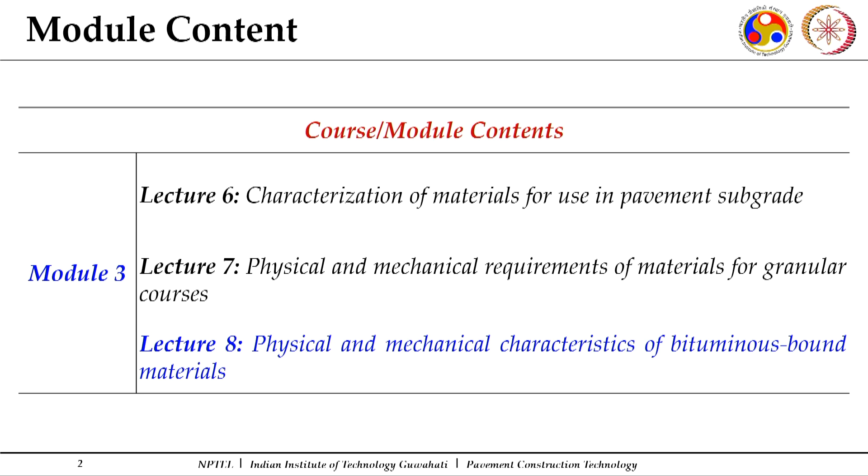Today's lecture will be a part of the discussion on the characterization of bituminous bound materials under module 3 of this particular course. At the very beginning, I would like to acknowledge the use of text, information, graphs and images sourced from various textbooks, codal standards, journal articles, reports, newsletters and public domain searches.

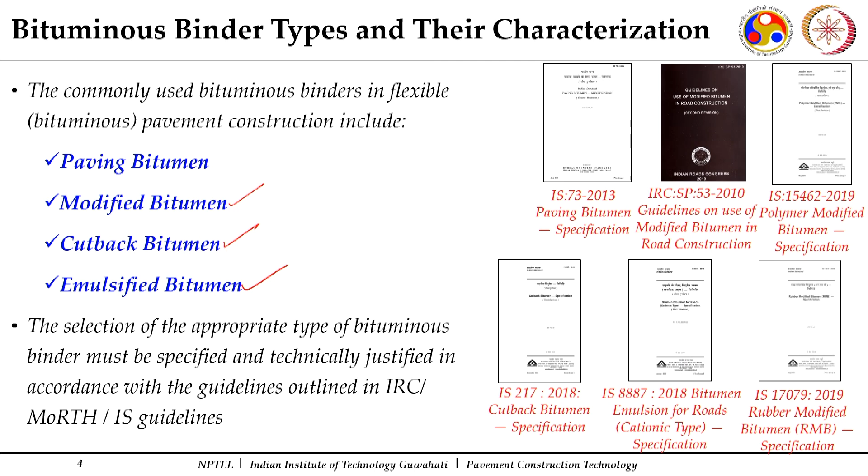In the previous lecture, we discussed the paving bitumen, the importance of bitumen, and what tests are normally used to characterize the paving bitumen. Then there are other forms of bitumen which are also popular: modified bitumen, cutback bitumen and emulsified bitumen. So, we will briefly discuss what these binders are and what applications they are put to in flexible pavement construction.

Now, as the term itself says, modified bituminous binders. So, you are modifying the bituminous binders or the bitumen, and what is the purpose behind this modification? What do you want to achieve by adding these modifiers to your paving bitumen? Normally, first of all, we want to improve the asphalt aggregate bonding, because this is very important.

If you have a good bond between binder and aggregate, you will have a good durable mix which will perform better under all different conditions. So, your binding between the bitumen and aggregate has to be good enough. If by any modification it gets enhanced, that modification will always be better for the performance. Next, to enhance the aging resistance, we have seen the aging determination in terms of the thin film oven, rolling thin film oven and pressure aging vessel, and we want the bitumen to age less during the production process and during its service life. So, any modification that makes a binder age resistant, or resistant towards oxidation, will be preferred.

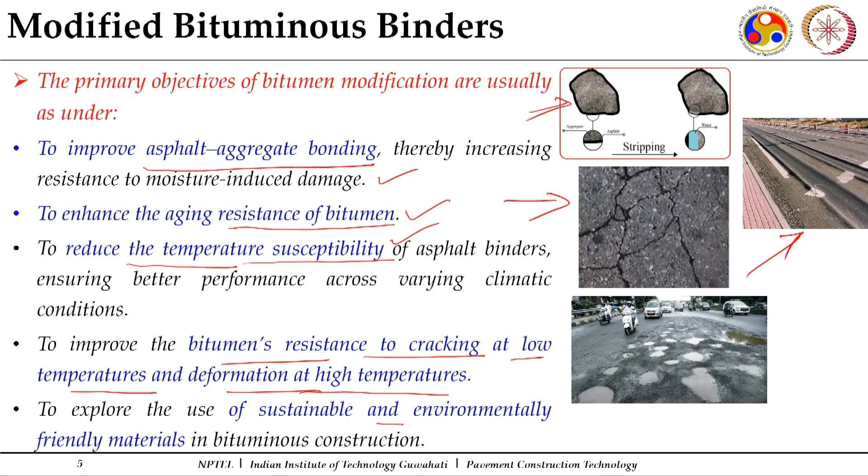Certain modifications are also attempted with some products to add sustainability to these bituminous mixes. You might have heard of the addition of waste plastic as a modifier in bituminous mixes. So, the binder is modified through the use of waste plastic. There we are trying to make use of a waste product in the binder modification, and the product we want to achieve is a good product with higher performance, which is also more environmentally acceptable because you are making use of waste products or alternate materials in construction. So, these are certain reasons because of which binder is modified.

The most common modification takes place with the use of polymers. The term polymer refers to a large molecule made up of many smaller molecules, called monomers, chemically reacting, and they form large chains and clusters. We have an IS specification, IS 15462, which defines the different characteristics of modified binder. These are synthetic, especially petroleum derived, products, and when the bitumen is modified by using these polymers, we call it polymer modified bitumen.

And these polymers are mainly divided into two categories. One is plastomeric thermoplastic polymers and second is elastomeric thermoplastic polymers. This is the one which is more preferred for binder modification, and few examples of what type of polymers are there under these categories. You have polyethylene, ethylene vinyl acetate copolymer, ethylene methyl acrylate copolymer, ethylene butyl acrylate copolymer, ethylene terpolymer. These are some of the polymers which fall under the category of plastomeric thermoplastics.

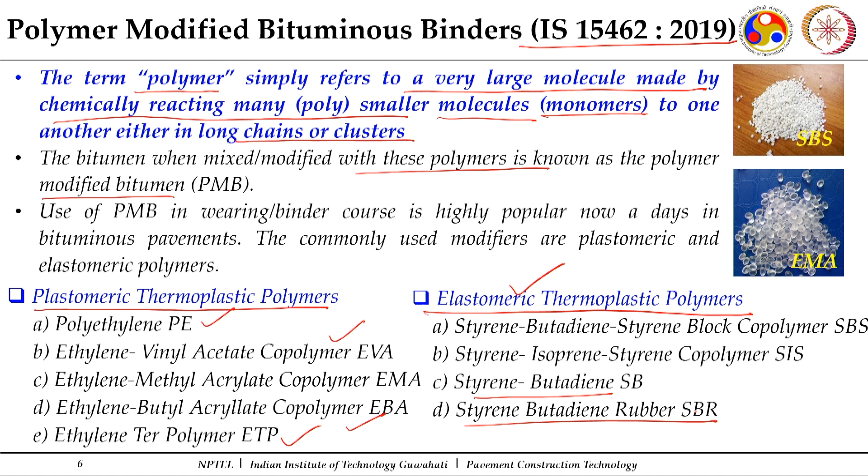And the quite commonly used elastomeric thermoplastic polymers are styrene butadiene styrene block copolymer, SBS, styrene isoprene styrene copolymer, SIS, and styrene butadiene rubber. So many other products in addition to this, like waste plastic I mentioned, that's also a kind of polymer. Then waste tire rubber is also used for binder modification. But the target is to enhance one or the other characteristics of the paving compared to the paving grade binder when you are modifying it.

The tests which need to be conducted specifically for judging the suitability of polymer modified binder are given by IS 15462. Many common tests are there which we do in the case of paving bitumen. In addition to this, for modified binders we need to work out the viscoelastic nature of the binders, and for that a dynamic shear rheometer is used, and many parameters derived from the dynamic shear rheometer analysis are also used to judge the suitability of the different modified binders. And as we had the viscosity grades of the paving grade binder, similarly here you have the different grades for polymer modified binder also.

You can see one grade is PMB 64-10, second is 70-10, third is 76-10, fourth is 82-10, and 76-22. So 64 represents the maximum pavement temperature for which this particular binder is suitable, and minus 10 is the minimum pavement temperature which can be for that particular region. So any region experiencing a maximum temperature around 76 degrees and a minimum temperature of minus 10 degrees, this PMB 76-10 will be suitable for it.

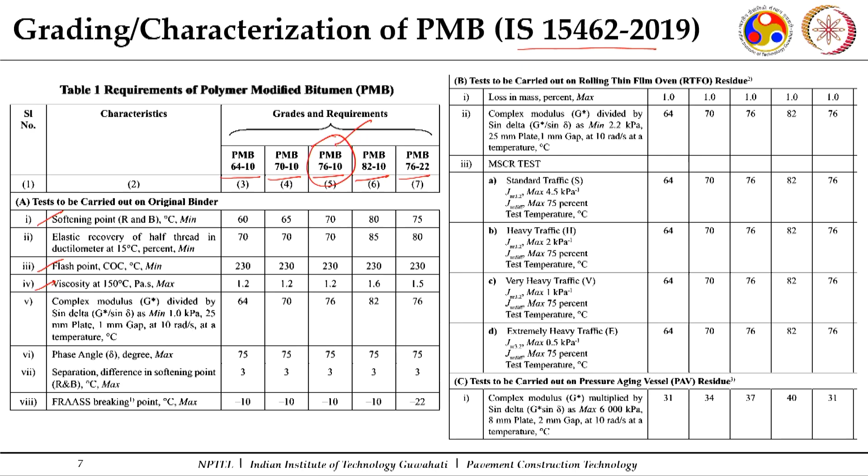And for the different requirements in terms of the parameters, you have some of the common ones which were used for paving, like softening point, viscosity, flash point. In addition to this, there are certain parameters derived from the dynamic shear rheometer to understand the viscoelastic nature, because now we are using modified binders which incorporate some polymer. So how well it is dispersed, how the compatibility is between the modifier and your neat bitumen, all these need to be ensured. So there are different tests and requirements for the different grades to be used.

The application of these different grades is also for different regions, as I mentioned. It says that for PMB 64-10, with an average maximum pavement temperature less than 64 degrees centigrade and minimum pavement temperature greater than minus 10, the 64-10 grade can be used. If I look at PMB 76-22, it has an average maximum pavement temperature less than 76 degrees and a minimum pavement temperature greater than minus 22 degrees. So depending upon the region in which we are using it, we can select a polymer modified binder grade.

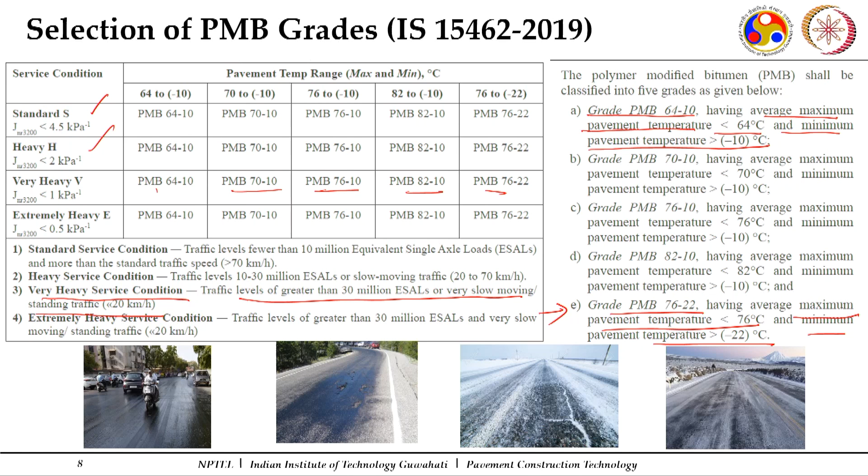In addition to this, it says for different traffic levels also: standard, heavy, very heavy, extremely heavy traffic conditions. Let us pick one case, very heavy service conditions, with traffic levels greater than 30 million standard axles, or very slow moving traffic. For that case, it is preferred that you select any grade out of this particular set. So this is the requirement depending upon different regions, and then there is a requirement regarding the G*/sin δ value. This is again a parameter derived from the dynamic shear rheometer to understand the binder's resistance towards high temperature deformation. So on the basis of this, different modified binders can be selected for use in different regions under different traffic loading conditions also.

Now, the other category of binder is the cutback bitumen. Cutback bitumen, as the word itself says, means we are cutting back something. So what are we cutting back here? We are cutting down the viscosity of the bitumen. It refers to a type of liquid asphalt produced by blending or cutting back paving grade bitumen with suitable petroleum distillates. When we add these petroleum distillates, we are lowering the viscosity of it, and these petroleum distillates are known as cutter stock or diluents.

So, we are producing this cutback by adding certain petroleum distillates, and we are bringing its viscosity down, and with this particular one we can apply it to the aggregates at lower temperatures also, because otherwise when you need to coat the binder over the aggregates at ambient temperatures, it is stiff, in a semi-solid state. So, the binder needs to be heated to temperatures around 150 degrees centigrade, and then aggregates also simultaneously need to be heated, and then they need to be mixed up.

So, this heating of binder can be avoided if the viscosity of the binder is already reduced. That we can do with the addition of these petroleum distillates. Now, this process reduces the viscosity of bitumen, making it easier to handle and apply at lower temperatures, because now you do not need to heat your aggregates to those high temperatures as well as your binder.

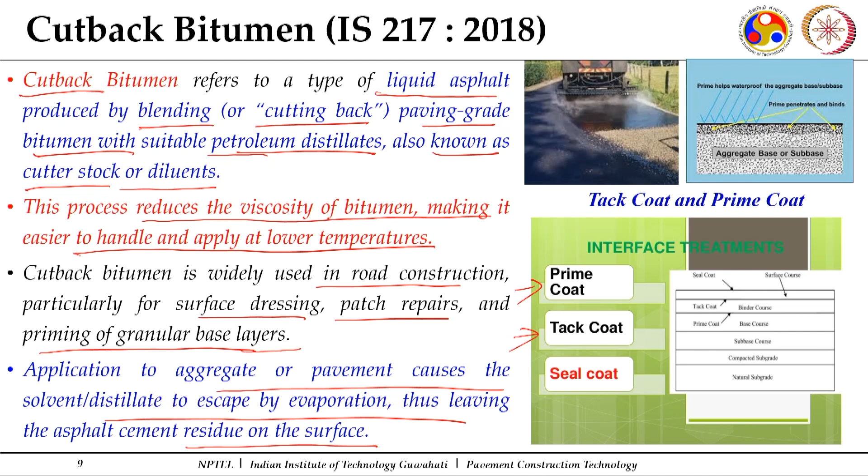This is shown as an application of a prime coat or an application of a tack coat. Normally, when we want to construct a bituminous course over a granular base course, we will first apply a prime coat, and thereafter we will go for the bituminous construction. And if there is an existing old bituminous pavement and you want to overlay it with a new bituminous layer, then the existing pavement is also given an application of a bituminous binder, which we call a tack coat. This we will further discuss when we will be discussing the construction of the bituminous courses.

Now, as there were viscosity gradings VG 10, 20, and PMB grading 76 minus 10, 76 minus 22, similarly, there are different grades for cutbacks also, and they have different applications. Like this is a rapid curing cutback where you are using a distillate which is naphtha, which evaporates very quickly. This particular one is used when no fine aggregates are available. If you want to prepare a mix with rapid curing, because the distillate will evaporate very quickly, you will get very little time to work with it. That is why you do not want very fine aggregates, because fine aggregates require more time for mixing because of their higher specific surface area.

And then there is another grade, medium curing cutback, where you are using some diluents like kerosene, and here it says that 40% of fine aggregates can be used. And again, some heavy oils are used to prepare the slow curing cutbacks, and here it says that more than 20% of fine aggregates can be used.

In addition to this, there are different grades within each rapid curing cutback also. There is RC 70, RC 250, RC 800, RC 3000. What does it represent? RC 70 means the kinematic viscosity, when measured at 60 degree centigrade, should be in the range of 70 to 140 centistokes. Similarly, for rapid curing 250, the kinematic viscosity when measured at 60 degree centigrade should be in the range of 250 to 500 centistokes.

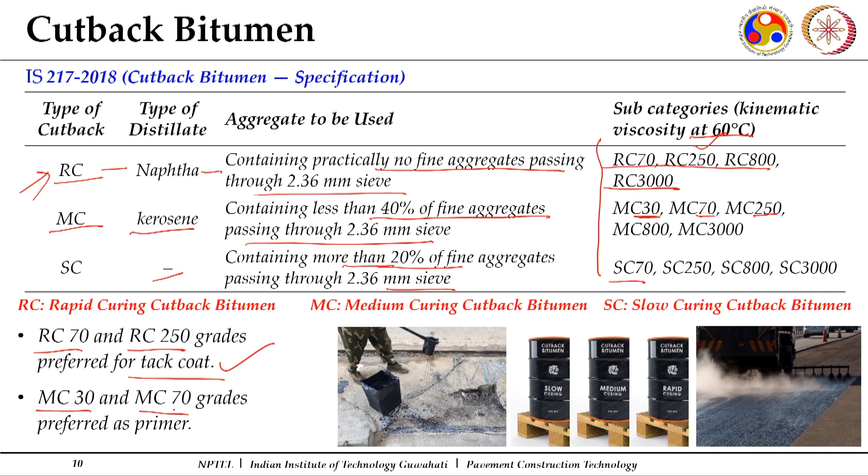So, this gives the idea about the viscosity of that particular grade, and as I mentioned, different applications are there. Like for rapid curing 70 and rapid curing 250 grades, it is preferred to be used as a tack coat. For medium curing 30 and medium curing 70 grades, it is preferred to be used as a prime coat. So, it is important to select the right grade for a particular application.

Now, the fourth category of binder is emulsified bitumen, or emulsion. Bitumen and water are two immiscible liquids.

Again, here the purpose is how we can bring down the viscosity of binder so that we can make an application at lower temperatures. So, one was adding the petroleum distillates, and second is this particular process which is called emulsified bitumen. Now, what is done? It is said that mechanical and chemical processes are involved to combine two or more materials that will not mix. Binder and bitumen and water in general will not get mixed. So, this is what is there, they will exist in different phases.

Now, what is done here? Bitumen emulsion is a liquid product in which bitumen is suspended in a finely divided condition in an aqueous medium and stabilized with a suitable material. So, what is done here? You have the two components taken here. You have water along with an emulsifying agent, and you have a bitumen. So, now you want to mix this. So, what is done here?

The bitumen is brought down to small globules, and this water along with the emulsifying agent imparts a charge on your bitumen globules. So, then the bitumen globules remain in a suspended condition. This aqueous medium along with the fine globules of bitumen leads to a lower viscosity, and this emulsified bitumen then can be applied at lower temperatures. So, hot bitumen and water containing an emulsifying agent are passed under pressure through a colloidal mill. This is a colloidal mill producing fine droplets of bitumen uniformly suspended in water. This is how it gets suspended. This is how a bitumen emulsion is made.

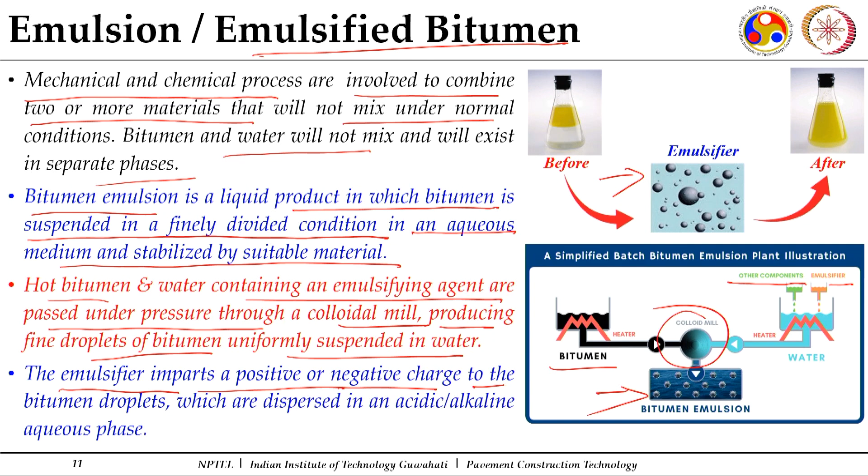So, the emulsifying agent which we use can impart a positive or a negative charge. If it imparts a positive charge, it is a cationic emulsion; if it imparts a negative charge, it is an anionic emulsion, with the bitumen droplets dispersed in an acidic or alkaline aqueous phase. Now, one example is the cationic emulsion. The emulsifying agent is introducing positive charges over the bitumen globules. So, this emulsion will have more affinity towards aggregates which are slightly negatively charged or slightly acidic. Most of the siliceous aggregates which are generally available are slightly negatively charged. So, these aggregates will perform better with your cationic emulsions.

And again, a cationic emulsion is one in which the emulsifier gives the bitumen particles a positive charge while surrounding the water in slightly acidic condition, and this emulsion breaks when the positive charge is neutralized. So, when you mix it with the aggregates, this gets neutralized, or when you apply it on the surfaces, it gets neutralized and the breaking of the emulsion takes place, and after some time the water evaporates and the binder remains over the surface of the aggregate or the existing road surface. Similarly, it is for anionic emulsions where the anion or the emulsifier is at the interface with bitumen, it is negatively charged, and the aqueous phase is alkaline.

So, again we have IS 8887 for cationic emulsion specifications, and IS 3117 for anionic emulsions. They state certain codal provisions and test procedures to check the suitability, whether a particular grade which is supplied by a refinery or a bitumen modification plant is to the standard or not. So, we need to check as per the requirements of IS 8887 for cationic emulsion and IS 3117 for your anionic emulsion. And as I mentioned, again here there are 5 grades: rapid setting grade 1, rapid setting grade 2, medium setting grade, slow setting grade 1, slow setting grade 2, and they have different applications.

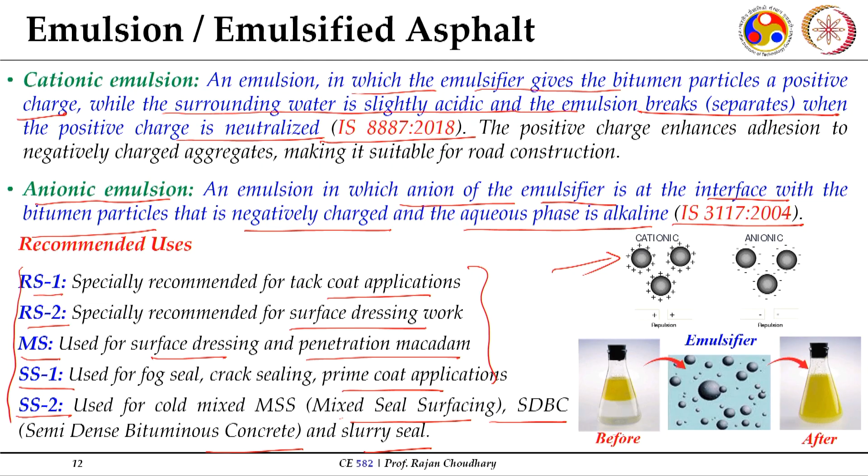Rapid setting 1 can be used for tack coat, surface dressing work, penetration macadam, and prime coat applications, and slow setting 2 can be used for producing mixes like semi-dense bituminous concrete mix which we discussed, and the other mixed seal surfacing or slurry seal. So, depending upon the grades, there are different applications of this emulsion.

But the concern with both of these binders is, in one case the distillate is lost to the environment. So, because we are losing some costly products to the environment, from the cost aspect also, from the environment aspect also, it is not good. The challenge with emulsified asphalt is that in both the cases you do not require to heat the binder, and the aggregates also do not require to be heated to those high temperatures which you require in case of paving bitumen. But in case of emulsified asphalt, when water evaporates, it leaves spaces.

So, if you are having a mix in it, when the water evaporates, void spaces are created because of the evaporation of water. So, the density is less. That is why there are certain things which need to be taken care of when you are making use of these emulsified asphalt prepared mixes.

Now, with some of the aggregate tests we discussed when we were discussing the granular courses, characterization of materials for use under the granular courses. In addition to those requirements, we discussed the Los Angeles abrasion value, the aggregate impact value, wet aggregate impact value, combined elongation and flakiness index, and the soundness test, a sort of durability test. In addition, water absorption value was also there.

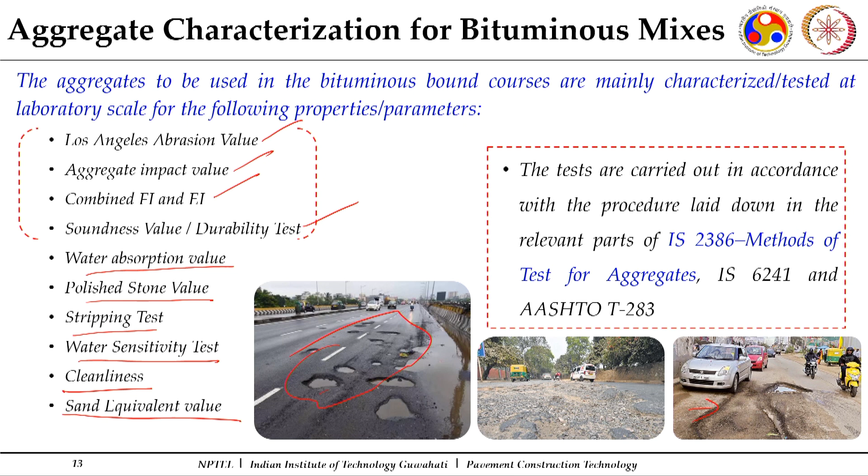So, you need to check your binder as well as your aggregates to the best of the requirements, the latest standards available. Now, first of all, looking at the aggregates from the bituminous bound aspect, coarse aggregates, fine aggregates, and the filler are the 3 proportions which we have discussed. There we also discussed that when we are using any crushed gravel, at least 95% by weight retained on 4.75 mm should have 2 or more fractured faces. So, this is one important requirement.

Rest, it says that the coarse aggregate to be used in bituminous bound courses should be clean, hard, durable, of cubical shape, free from dust, soft or friable material, or organic or other deleterious matter. So, this should be ensured whenever any source of coarse aggregate is selected.

Fine aggregates, it says, especially when you are using them in the binder and the wearing course. Wearing course is the top course below which comes our binder course. When these 2 courses of flexible pavements are there, we will not prefer to use natural sand in these 2 courses. If we go a course lower than the binder course, which will be your base course, we can use only 50% natural sand, because natural sand does not impart good resistance towards deformation. It is completely rounded, so there is a lot of chance that the particles don't get interlocked in a good manner, and when the traffic or stresses come over that particular bituminous course, it gets deformed. So that's why the percentage of natural sand is controlled or limited.

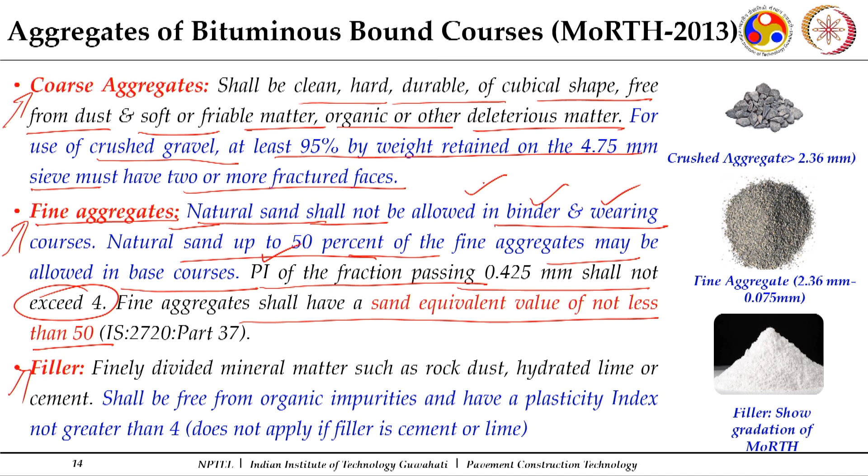This can also be ensured through the plasticity index requirement which is given. It says that the plasticity index of this material should not exceed 4. So this is another requirement mentioned for fine aggregates. So we have the requirement in terms of sand, the requirement in terms of plasticity index, and the requirement in terms of sand equivalent value.

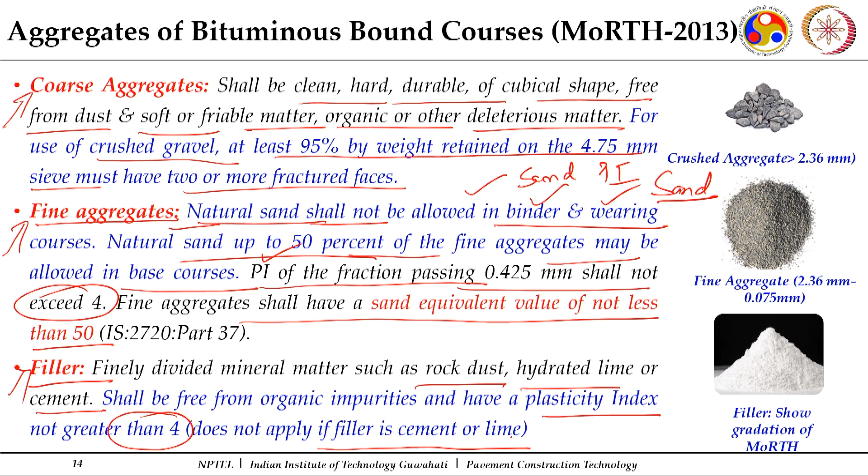Then comes the filler, the finest one. Normally, 85 to 100% of the material should pass through the 75 micron sieve. This is normally what is called filler, the material which usually passes in this percentage through the 75 micron sieve size, and this material can be rock dust produced from stone quarries, hydrated lime, or cement. Again here we are going to check the plasticity index, and it should not be more than 4, and this plasticity index requirement can be omitted if the filler is cement or lime, because they are non-plastic materials.

Now what is required here? We need to look into the cleanliness part, or we can say the grain size analysis part. One requirement is that the aggregate has to be clean.

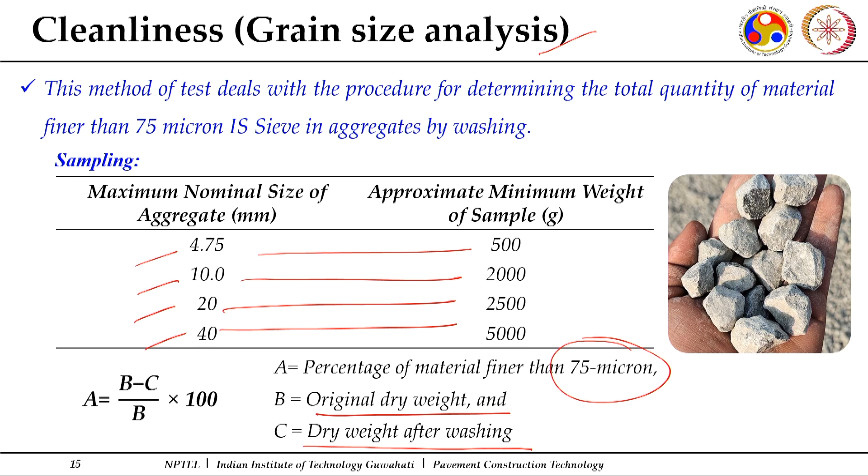How much amount of material is to be taken up, and then we are going to sieve it. What we are going to see is that here B is the original dry weight, and C is the dry weight after washing. Wet washing is to be done through a 75 micron sieve. So all fines should pass, and we will see how much percentage of fine is there. So this percentage needs to be restricted when you are using any material in bituminous bound courses. Any fines which got stuck to these coarse aggregate particles should be within a given limit only.

Otherwise, if this dust is more over an existing aggregate surface, the bonding of a bituminous binder with this aggregate will get affected because of the presence of this dust in between the binder and the aggregate surface.

Sand equivalent value, as I mentioned, is again to get an idea about how much amount of clay is present here. This test is to be conducted as per IS 2720, and here specifically an oven dried sample is taken, and we prepare a solution which we will put in this cylindrical measure, and then the fine aggregate sample is to be introduced into it.

It has to be allowed to settle for a period of time, then you are going to agitate it, then it is again allowed to settle, rest for a period of time, and then finally you are going to see the reading. When it gets settled down, you are going to lower the assembly. It says that a weighted foot assembly is gently lowered and it rests over this particular one, where you can see two different layers. One is your sand and the second is your clay.

So you are going to measure the sand height and you are going to measure the clay height, and the sand equivalent value is sand reading upon clay reading. It should be at least greater than 50%. This is the requirement we saw in the previous slide. So this controls the amount of clay which can be present in your fine aggregates. We are ensuring this through plasticity index also, but we ensure through sand equivalent value also to control the presence of fine materials.

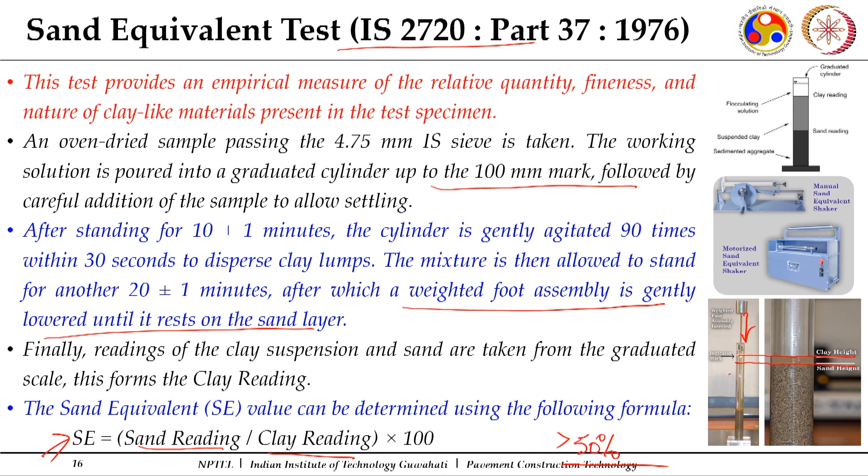Water absorption: certain aggregates may have more surface voids, and they may capture a lot of water, specifically when they are lying open. When aggregates are produced at crushers and lie in open spaces during rainfall events, they will absorb some water. So one is the natural moisture content which is present, and if these surface voids are more, when these aggregates are used with any bituminous binder, these surface voids will occupy more amount of binder also. This will make your mix more costly, because the binder which goes into these superficial voids will not help you to develop any bonding or strength, because it goes inside the surface voids.

To ensure this, we check the water absorption of the aggregates, that is, how much amount of superficial voids are there. This is how it looks. This is an exaggerated view. You can see these surface voids are there. These surface voids get filled up with water if I keep these aggregates in water for say 24 hours. Then I take it out and rub gently the surface water which will be present. Only the water which is within these voids will be considered for water absorption. When this is done, this condition is known as saturated surface dry. So you have saturated the aggregate particle, and the surface is also dried.

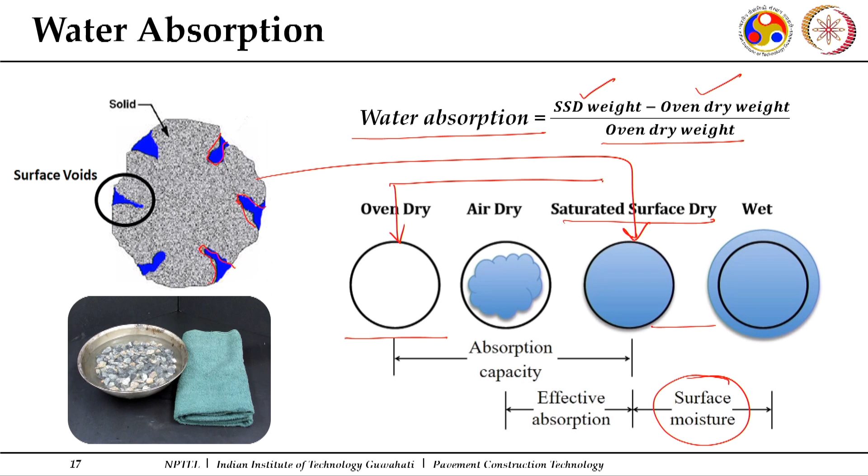So here in this case, once you submerge the aggregates in the water, take it out, you remove all surface water by gently using any towel or cloth, and then what you get is your saturated surface dry. And these two, oven dry weight and saturated surface dry weight, are used to determine the water absorption. Another parameter which is used is the stripping value of your aggregates.

Now this test is used to judge how good the binder is coating with your aggregates, especially because binder will be more or less having in general a good affinity with the aggregates, but certain aggregates have more affinity towards water compared to bitumen, and certain aggregates have more amount of water absorption, surface voids. So we want to see how good that aggregate forms a bond with a given sample of bituminous binder.

So for this one, we'll prepare a mix with a given weight of aggregate, we'll add a binder to it, and this is to be done as per the Codal specification. Aggregates are to be heated to a particular temperature, binder is also to be heated, 200 gram of aggregate sample is taken, around 4% of it, 8 gram of bitumen is to be taken, both of them are to be mixed together. Then you need to transfer it to a cylinder, a measure where it will be covered with water, and before subjecting it to this, the mix which is prepared is kept in oven for around a period of 2 hours at the temperature at which this mix is produced.

Why is it done? So that all these surface voids which are there on the aggregates will absorb the bitumen. It will also lead to a small amount of binder absorption into the aggregate surfaces. So this conditioning is done. Once the mix is prepared, the mixture is conditioned in oven for 2 hours and then transferred to a beaker containing 500 ml of water, and then this water is boiled.

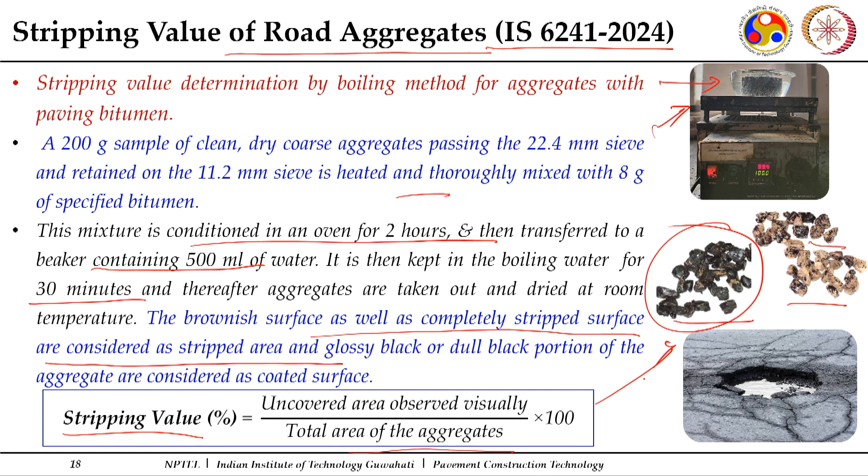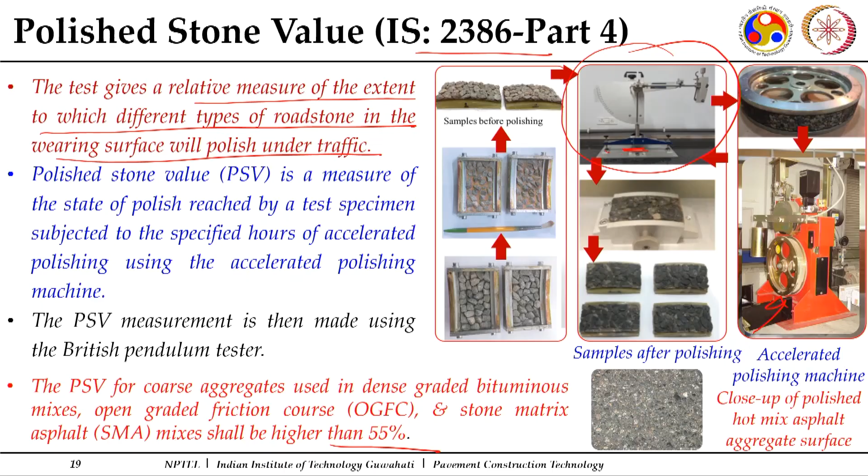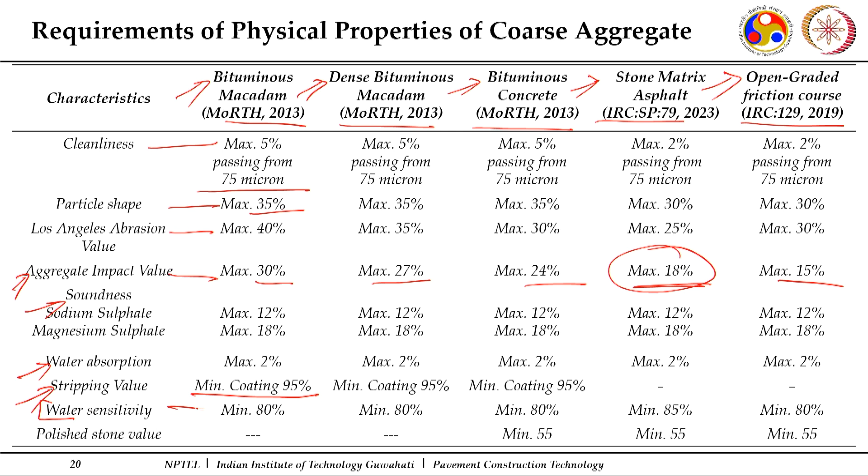What is the purpose of that particular mix in this case? Stone matrix asphalt requires aggregates to have a high resistance towards impact. So they need to have good tough aggregates. That's why the aggregate impact value has to be less than 18% for use in stone matrix asphalt. Then we have the soundness, water absorption, stripping value, minimum coating 95%, and water sensitivity. This is another test which we will discuss when we discuss the mixes in the coming slides. Then the polished stone value, especially, says the minimum value should be 55.

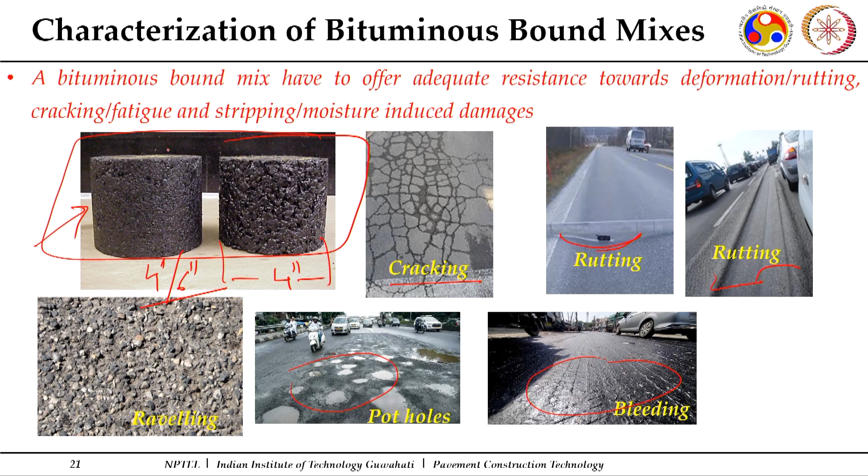The conventional sizes normally used are 4 inches diameter and around 2.5 inches height, or 2 inches of height. So we will prepare these specimens and ensure some properties of these mixes so that they are resistant towards cracking and any deformation which can happen. This is shown as rutting deformation. They should have good bonding with the aggregate. The binder should not become soft enough. So we are going to check finally these mixes, because this is the mix. We have individually ensured aggregates and binder. Now we are going to ensure for the mix also.

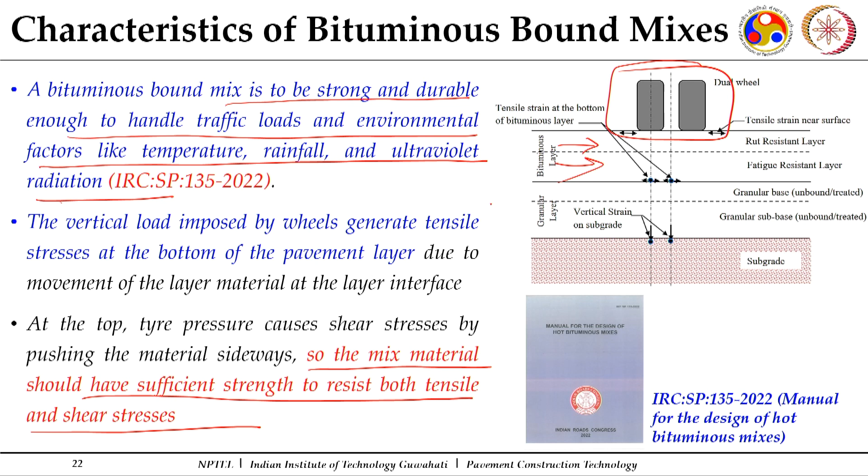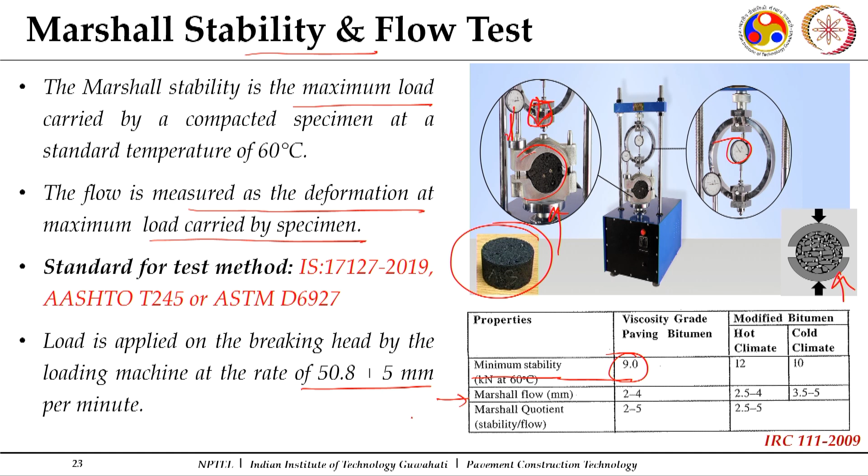This is one parameter, and the rate of loading is also standard, as is the temperature at which it has to be done. This we will again discuss when we discuss the design of bituminous mixes. And then there is a requirement that for a particular kind of mix, the minimum stability, that means the minimum amount of load it should take, is 9 kilonewtons. So that means 900 kg weight load it should take before it fails, and there is a requirement of Marshall flow also. This is one requirement for the strength, which is checked during the design of the bituminous mixes.

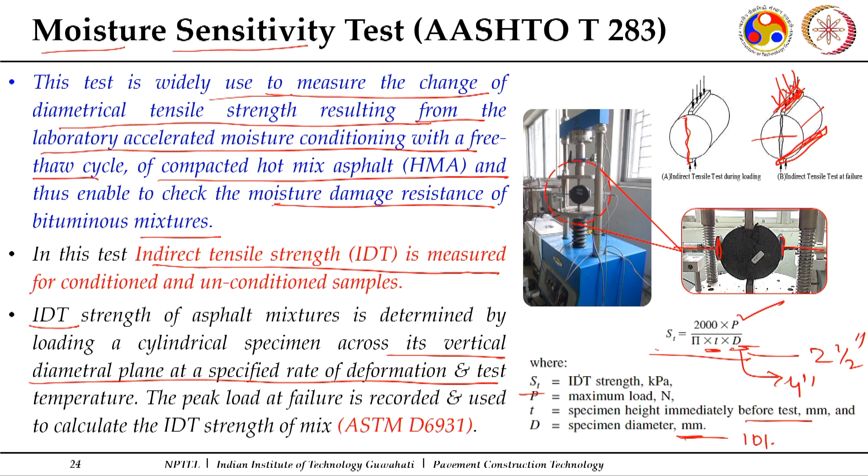So this gives you an idea about the tensile strength of this specimen, and the expression used is: St is the IDT, indirect tensile strength in kilopascals, where P is the maximum load in Newtons, t is the specimen thickness, which is normally 2.5 inches, and D is the specimen diameter, which is 4 inches. Here it has to be given in mm, so around 101 mm for the diameter, and the thickness may vary from 50 mm to 60 mm. So this gives you the indirect tensile strength of a compacted specimen.

Now, for looking into the moisture damage resistance, this specimen is subjected to different moisture conditioning environments. In one case, for an unconditioned sample, the mix is kept in a water bath to bring its temperature to 25 degrees centigrade. In the second case, the mix is first produced at a definite amount of air void content and then saturated. So we are intentionally saturating that mix with water. Water enters into the mix with the application of vacuum, and finally, once the water has entered, the specimen has got saturated in the range of 70 to 80%.

It is subjected to a freezing action of minus 18 degrees for 16 hours, then thawing at 60 degrees centigrade for 24 hours. So in this manner we give cycles of freezing and thawing to the specimens when they are saturated with water, trying to simulate the moisture related damages which can happen in bituminous mixes. And then finally, this conditioned specimen is also brought to 25 degrees centigrade by keeping it in a water bath. So now this is a conditioned set and that is an unconditioned set, and we are going to measure the indirect tensile strength for both the conditioned set as well as the unconditioned set, and the ratio of these will be called the tensile strength ratio.

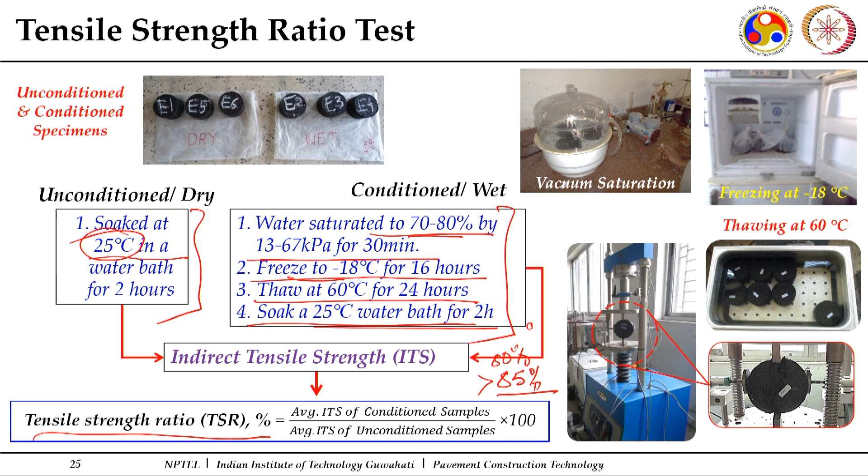So, a mix which is more resistant to moisture-induced damage will have a higher value of this parameter, and a mix which has lesser resistance towards this moisture-induced damage will have a lower value. For most of the mixes, it should be more than 85%; certain requirements may say more than 80%, some may say more than 90%, depending upon different requirements. It says that the tensile strength ratio should be more than 80%. Most of the cases it says it should be more than 80%.

And this parameter, which is the last one, again very commonly used for judging the strength of bituminous bound courses, is the resilient modulus. The term itself says resilient modulus, which is the elastic modulus, because this is the parameter which is used in the design of flexible pavements in India, which is done as per IRC 37. So, here resilient modulus is the parameter which takes into account only the elastic or resilient component of the deformation of the specimen in a repeated load test.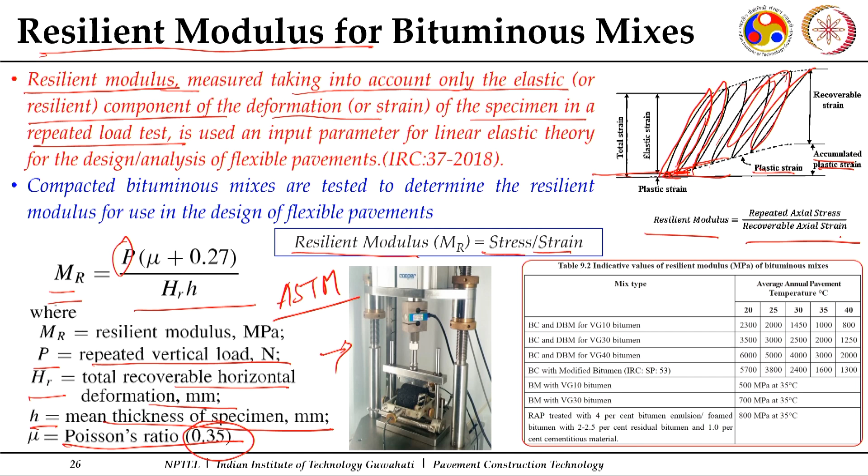Now, this is one parameter again. So, we need to ensure the aggregates, binder, and mixes also. There are many more parameters, many more tests which are done on aggregates, bituminous binder, and the mix, especially the compacted mixes, to ensure their suitability for road construction or for flexible pavement construction. The ones I have discussed here are the most commonly specified: the binder part for paving bitumen, the aggregates for most of the common courses, and the ones for bituminous bound courses as per the design requirements for bituminous mixes. So, this is all for the different tests for the characterization of bituminous bound courses. Thank you so much.